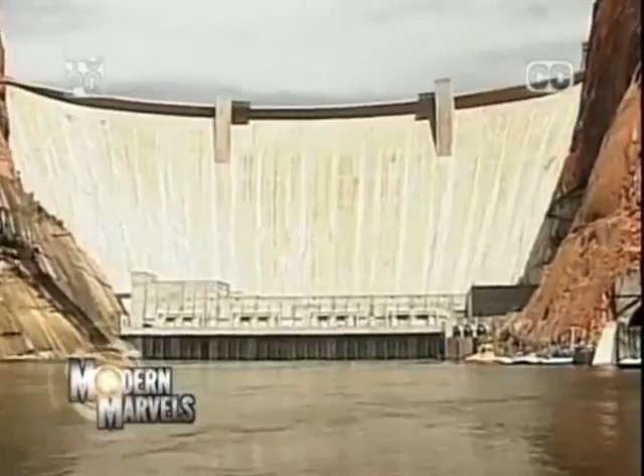A simple shape, a span across space and time, and the single most influential form in Western civilization, perfected by the ancient Romans. It spans great rivers, takes us deep into the sea, and will enable us to live on other worlds. It's the basic building block in human history, finding its way into millions of structures for millennia. Now, the Arch, on Modern Marvels.

The Arch. In its many forms, this uniquely adaptable and robust shape has dominated the Western world since its invention over 2,000 years ago. Its characteristics: able to span long stretches, carry incredible loads, and withstand the ravages of time, all while being composed of the simplest materials, make it the most enduring building form known to man.

The idea behind an arch is that it channels the force that the structure needs to support in a way that is most efficient in terms of the way it uses the material. No other shape comes close to the arch and its relatives, the vault, cylinder, and dome, for efficiency. But there was a time when such structures were unknown.

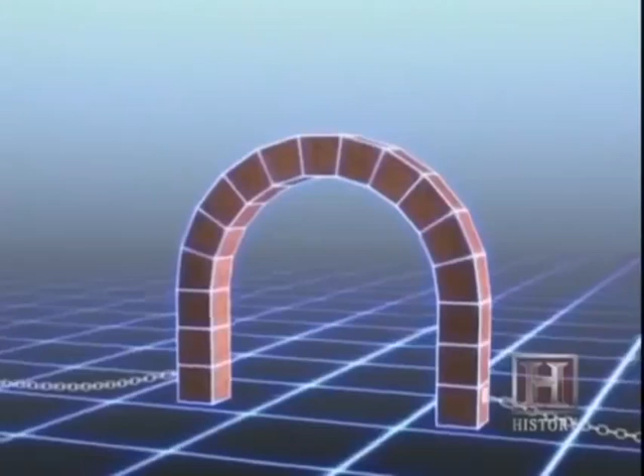The arch can carry enormous weight and is purely a compression structure. That is, it can withstand pressure. The more force that's applied, the more compressed the arch becomes. On the other hand, if you apply tension to it, it loses its strength rapidly as the legs of the arch begin to spread. The arch can collapse. The secret of stability in arch design is to contain the forces, or the line of thrust as it's called, within the arch.

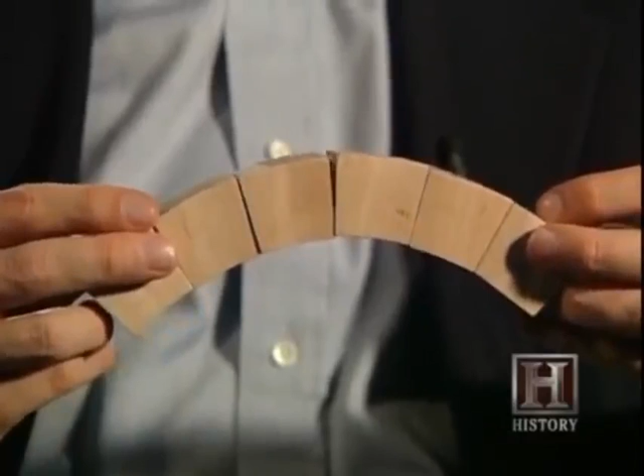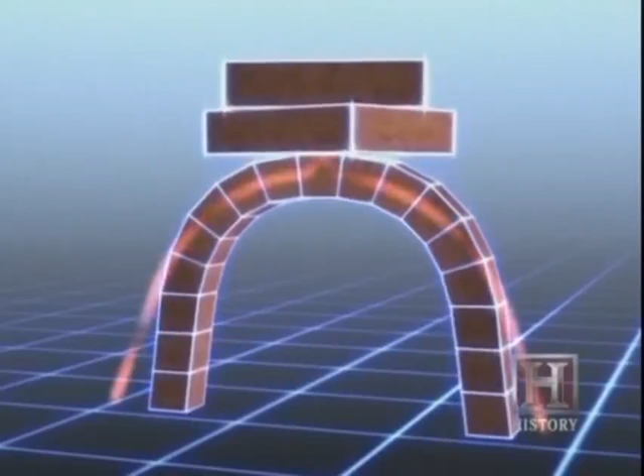As we move supports around, the arch can adjust to these different movements and can adapt with new internal forces. And the key really, or the magic, is that they can carry so many different possible loadings. And as the ground moves, the arch quite happily adjusts to it. It's in equilibrium, it stands. We can find a line of forces through one. As long as the line of force is contained inside the structure of the arch, or terminates at the arch supports, it can stand practically forever. But if the line of force moves outside the arch because of increased loads or changes in shape, it will fail.

The Romans understood this. It's a tribute to the fact that the Roman engineers knew about how their structures could redistribute forces even after they become damaged. Arches come in all sizes, shapes, and styles. The classic Romanesque arch is a semicircle, built of stone or concrete.

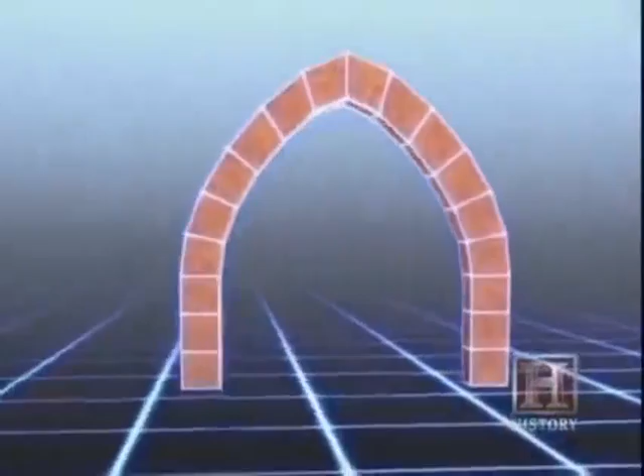The Gothic arch from the 12th to 15th centuries has a pointed crown, allowing for more open spaces. Other arches include the basket handle arch, popular in Britain, which allowed a very broad opening. And in the East, horseshoe or Moorish arches appeared, with less structurally sound but unique-looking forms.

Although an arch's primary purpose is to support a load, its shape invited artistic innovations. As arch design progressed, the use of stone became a highly refined craft. The placement of stones, and especially the keystone, became a personal statement of the designer. A keystone is the last stone placed in a traditional arch. It's the stone that locks the arch into place.

Keystones were traditionally made larger and more important looking than the other voussoirs or arch stones. But surprisingly, this was largely a cosmetic choice. You hear a lot of talk about the keystone in an arch being this most critical piece, this most special piece. The keystone has the smallest amount of force, yet it gets all of this attention. It's kind of a paradox.

You'd expect to have more force at the middle, but the smallest force is at the middle. And therefore, a keystone does not actually carry very much force. If you have an odd number of voussoirs, they're called the pieces of an arch, then there is an odd one in the middle, which is the keystone. If, however, you make the arch out of an even number, then there is no keystone. But being the last stone in the arch, the keystone does have one very special purpose. Without it, the arch will fall down.

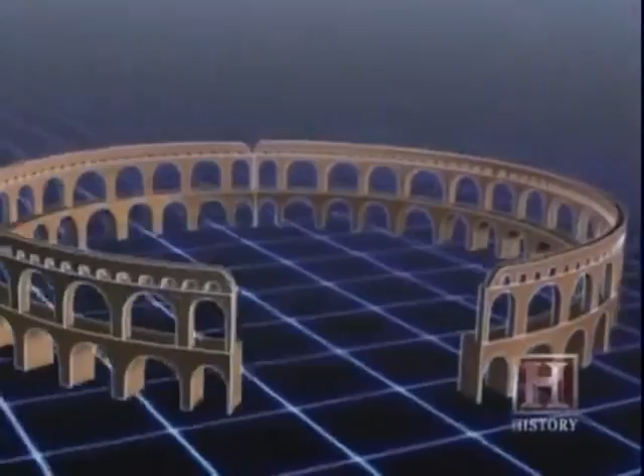These astounding structures were a stunning testament to the ingenuity of their designers. But there was much more to come from the basic design of the aqueduct. I think of the Colosseum kind of as a Roman aqueduct that's folded onto itself to enclose space. It was the arena of the emperor and the citizens of Rome. Over 600 feet across at its widest point and 160 feet high, the Colosseum was home to myriad events. It allowed up to 75,000 spectators to watch great gladiatorial battles in architectural splendor.

The use of concrete is perhaps the most exciting aspect of Roman building technology. The arch is a structural form. It would work with concrete or it would work with rock or masonry, but the Romans took the arch to another level. The Roman invention and use of concrete for construction led to the development of another use of the arch, the barrel vault. So instead of a single arch now, you have a room with a series of arches, and so that's three-dimensional, it's a vault.

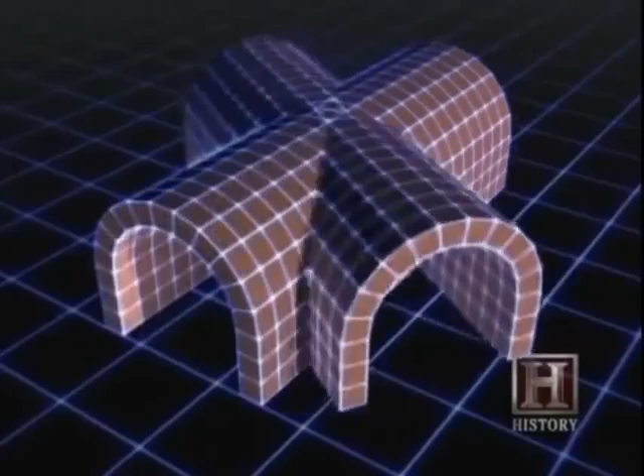But the Romans went way beyond that. They also took arches and they turned some arches 90 degrees to the first and made intersecting arches. So it's as if you took two barrel vaults and intersected them, and in the middle you have a big open area that's a groin vault. That's a clear Roman innovation.

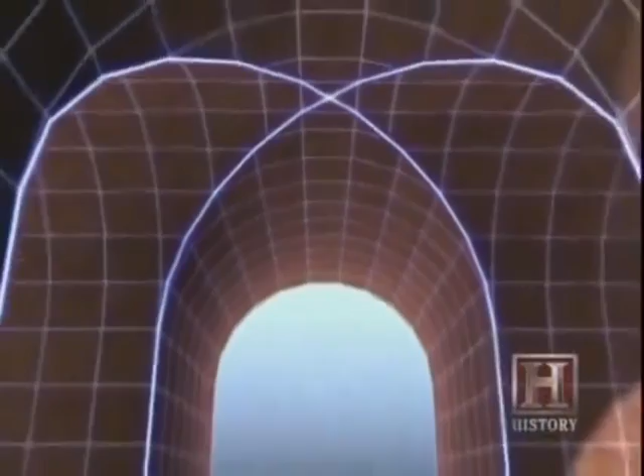Impressive though it is, the Colosseum was just a precursor for more remarkable structures to come. Just across Rome, the Pantheon was built in 125 AD. This innovative building would set the standard for centuries to come.

One sees structures like the Pantheon, and the most shocking, breathtaking aspect of walking into a structure like that is open space. What domes afford is interior space unencumbered by column support. The columns, of course, or the walls are on the periphery of the dome, and they're transmitting all the compression force from the dome down through the walls into the foundation.

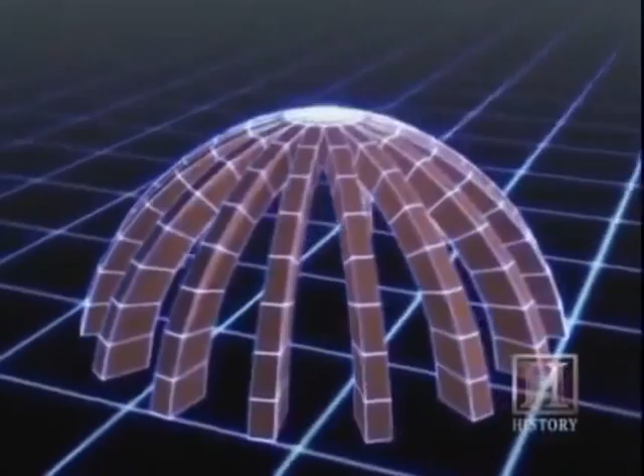The roof of the Pantheon was the world's first large dome. It was an unprecedented accomplishment. You could think of a dome as a series of arches that are all leaning on each other in the middle. But in addition to that, a dome acts as a series of hoops that surround the dome. So what prevents the dome from falling inward, there are arches in plan that are really circles that also can carry load in each ring of the dome as you build up.

The Pantheon has a traditional temple entrance, which opens to the great dome-covered interior. But there's a surprise once inside. In the exact center of the dome, there's a hole that brings in light. So you have all of these arches that are leaning together to form the dome. And exactly at the center, where they all want to lean together, Roman engineers take away the material and build a hole in the middle of the dome.

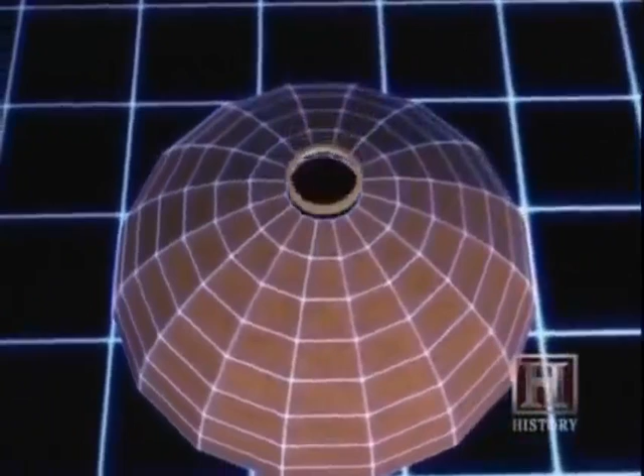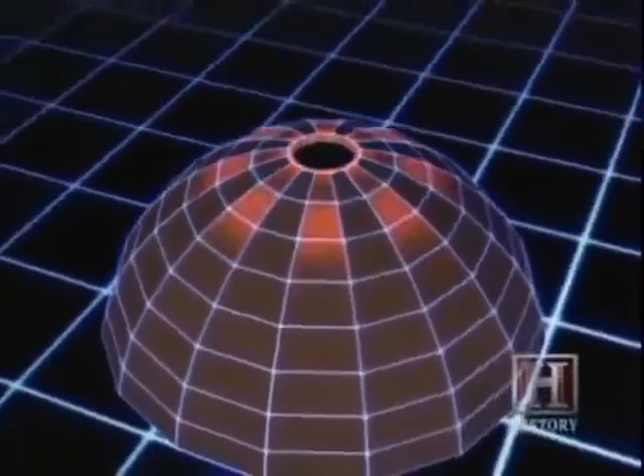The 30-foot wide hole in the dome center, called an oculus, is a huge compression ring made of stone, which in effect is a series of arches forming a circle. The horizontal forces of the dome, which keep the structure stable, converge at the top. It was a daring move by the Roman engineers. The Pantheon was an amazing achievement. But after the fall of Rome, builders would find other spectacular uses for the arch.

The Colosseum originally had 80 arches in each exterior level, totaling 240 arches above ground alone.

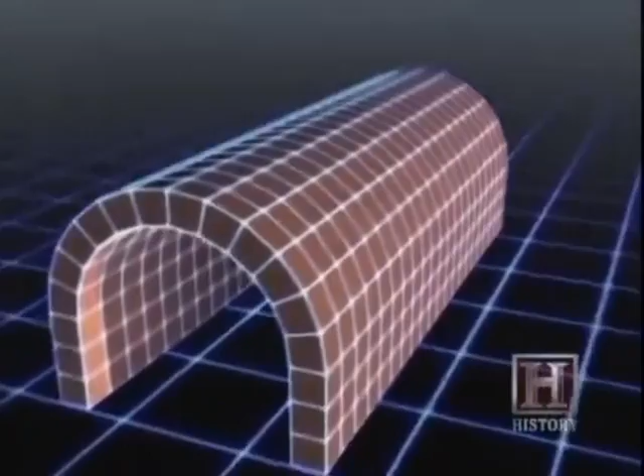The biggest advancement during the Gothic era was getting away from the barrel-type vault and using more of an elliptical arch or a pointed arch. So from a visual perspective, it allowed the arch to be much taller. And the goal of the master builders during the Gothic era was to try to bring in as much light to the interior of the cathedrals as they could. So the taller they could make the arches relative to the width, they were able to introduce far more area of window.

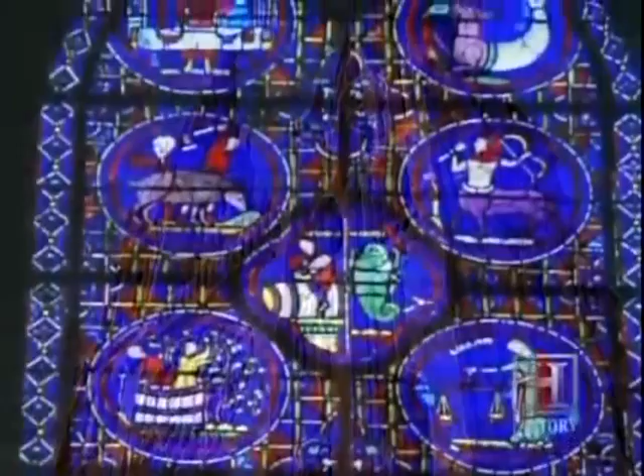The era of the Gothic cathedral also saw the use of less massive design elements. Continuing to strive for higher and grander, church builders developed new techniques to maximize their uses of the arch. Gothic cathedrals such as Notre Dame in Paris are lasting examples of the incredibly complex workmanship of the master builders of the time. Cathedral ceilings reached heights of up to 150 feet. As these arches soared ever higher, materials were used more sparingly to allow for this vertical growth, resulting in thinner walls, pillars, and vaults.

But with this increase in height, intense forces were exerted by the soaring stone arches and had to go somewhere. The Gothic designers came up with an ingenious solution. You still have to get the thrust of the arch down to the ground. So how do you do that? That's the real challenge in Gothic construction. And this is where the really ingenious breakthrough comes of building flying buttresses, which are exterior, elevated half arches, really, that carry the flow of forces from the main vault down to the ground.

So as the arched ceilings grew wider and taller, the sides of the building wanted to spread. The use of flying buttresses provided a rock-solid method of reinforcement for the thin cathedral walls. You can think of it as half of a Gothic arch. So a Gothic arch with a point at the middle. If you take those two sides and separate them, they each want to lean inward. And so they can help to resist the thrust from the central nave that acts between those two flying arches.

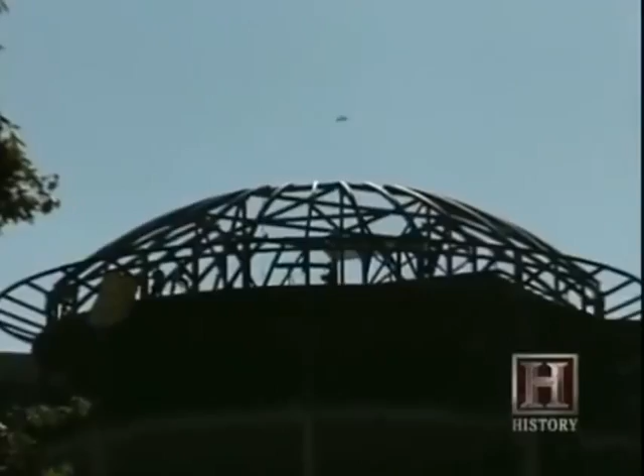Domes continue to be used in modern construction to great effect, but the arch has found its way into other, sometimes surprising modern structures. And some arches literally do their jobs lying down.

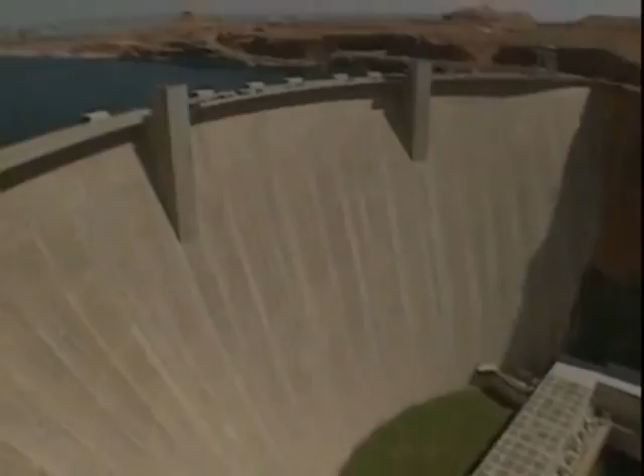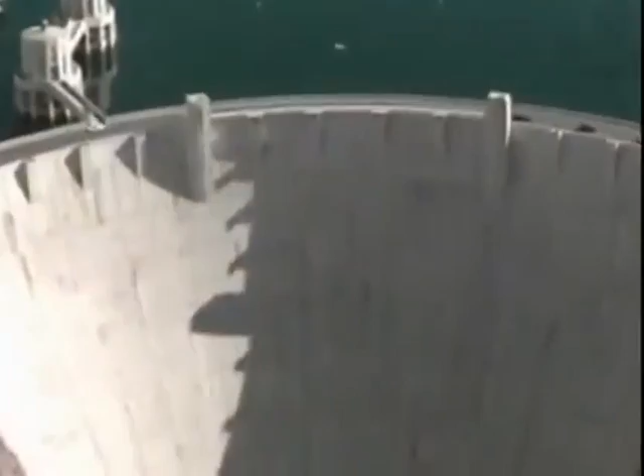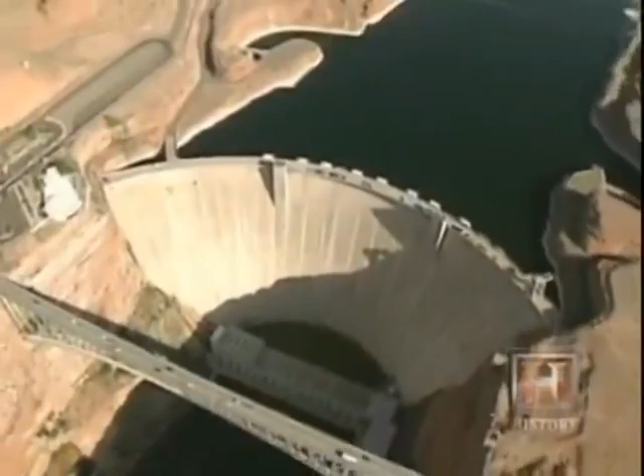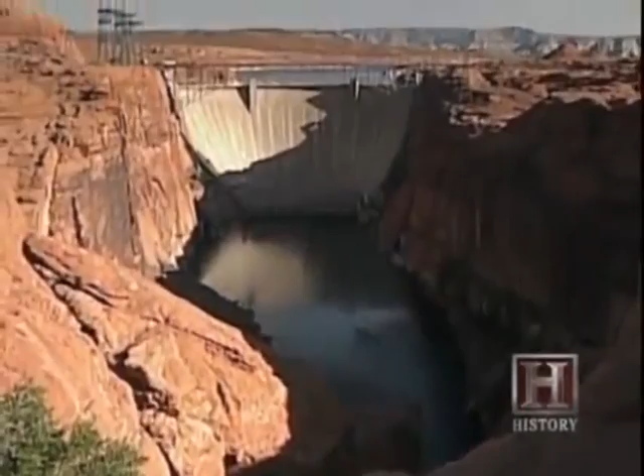The mighty Colorado River is harnessed in the American Southwest by 9 main dams. 2 of these enormous concrete structures are examples of the arch turned to a new and critical task. An arch becomes a dam when the arch is turned on its side and has the pressure of the water acting against it. In fact, many of these structures are just that, a simple arch.

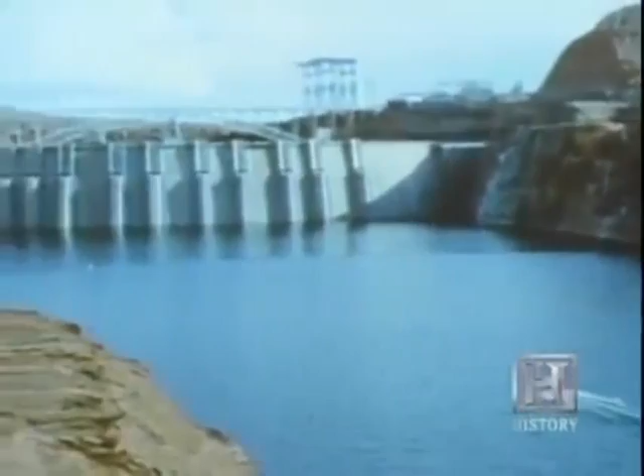Arch dams are different than other dams because of the nature by which they resist the water forces. Most dams do so by the sheer weight or gravity, and arch dams do some of that because they have mass, but they're an arch tipped on its side, and it has arch action that thrusts the loads into the abutments, which are at the end of the arch.

And those loads are resisted by the rock of the canyon, and they pretty much put the rock of the canyon into compression, which makes arch dams ideal for steep canyons, V-shaped, U-shaped canyons with good strong rock on either side, which is where you'll find most arch dams.

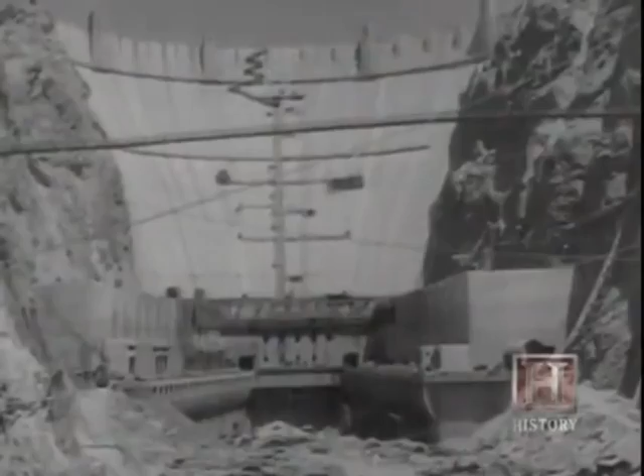726 feet tall and up to 660 feet thick at its base, Hoover Dam was the largest concrete structure of its time. It required over 4.5 million cubic yards of concrete to build the massive arch. And it withstands the pressure of 9.2 trillion gallons of water in Lake Mead.

Because the water pressure comes from the depth. It's the hydrostatic pressure that comes from the depth of water that's supported. So, in fact, supporting a lake that's only 1 foot wide provides the exact same force as a lake that would be 100 miles wide.

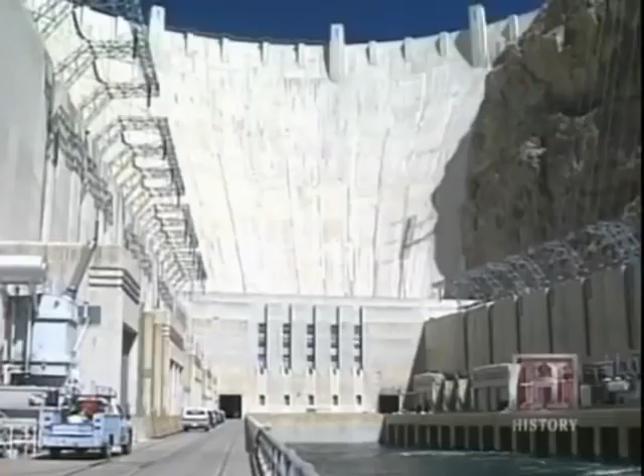As dam designs became increasingly daring, relying more upon the strength of arches, dams became thinner and more refined. One such structure resides not far from Hoover Dam. Glen Canyon is a beautiful arch. You can't deny that it's a very beautiful and magnificent engineering marvel. It's more of a thinner section. It's more of a true arch.

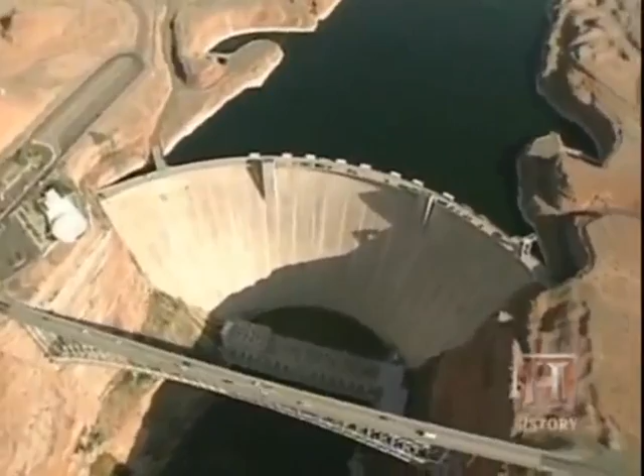With a thin concrete slab 710 feet high and 1,560 feet long at the top, the dam relies on the shape and characteristics of the arch to resist the force of the water behind it, while using a minimum of material to do so. It's 25 feet thick at the top and over 300 feet thick at its base, and is extremely strong for its relatively limited mass.

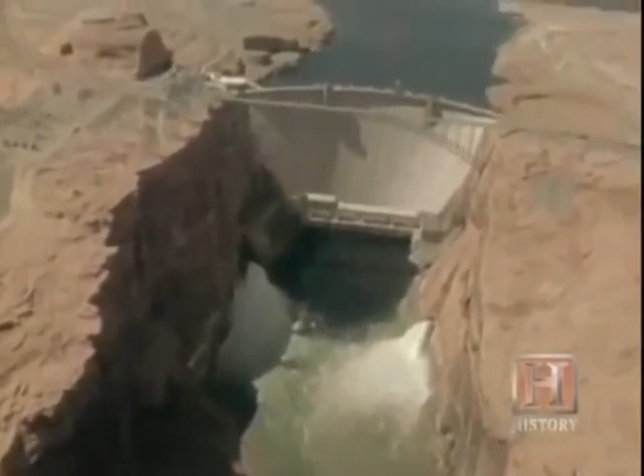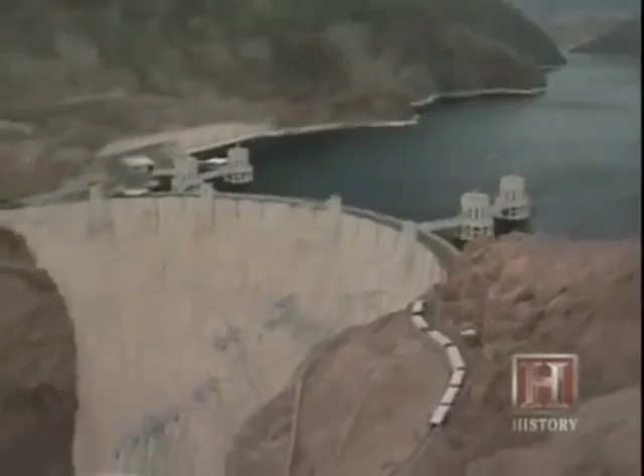The idea of the arch dam is to keep everything in compression and to minimize the bending that goes on in an arch. And if the dam can avoid tension, the enemy of any arch, and stay in compression, it can last for hundreds, perhaps thousands of years.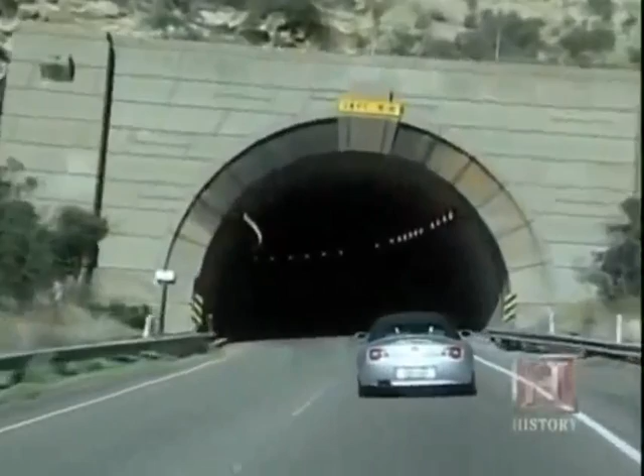Dams are clear examples of the strength of the arch. But less obvious, yet familiar to us all, are tunnels, which use the strength of the arch deep underground. Another example of arch action in which forces are redirected into compression is a tunnel. Many of us drive through tunnels on our daily commute.

You'd have to ask yourself, where does the weight of all of the soil and rock above the tunnel go? It has to get redirected. It has to go around the tunnel, and it goes around the tunnel because of arch action.

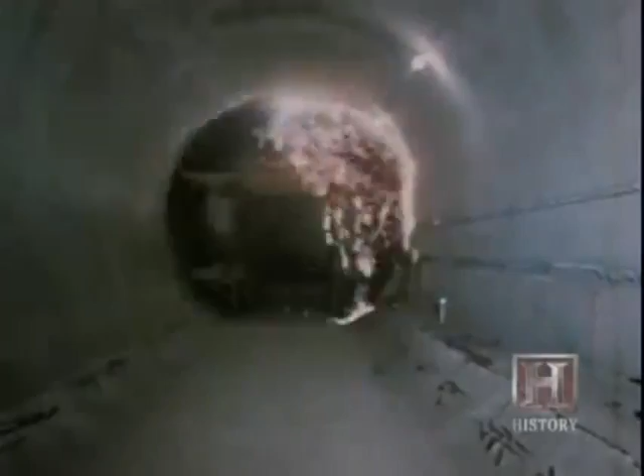While the Romans built small arch tunnels, the craft of modern tunneling really started in England in 1825, when Marc Brunel took on the great challenge of digging beneath the River Thames. In the case of Brunel's tunnel under the Thames, if he'd built just one large tunnel, one large opening, he was concerned about the loading coming from the sides failing the tunnel.

And so what he did was he introduced a central pier with two kind of arches that were bearing on that central column. He was concerned about the size of the forces, so he cut the span in half by adding a central wall. Brunel's innovative tunnel paved the way for something much bigger.

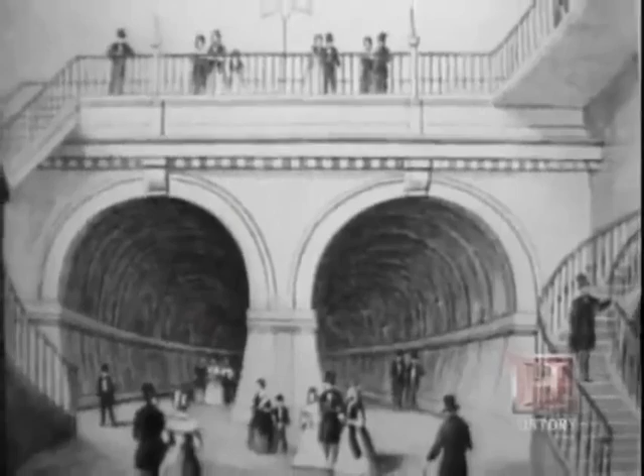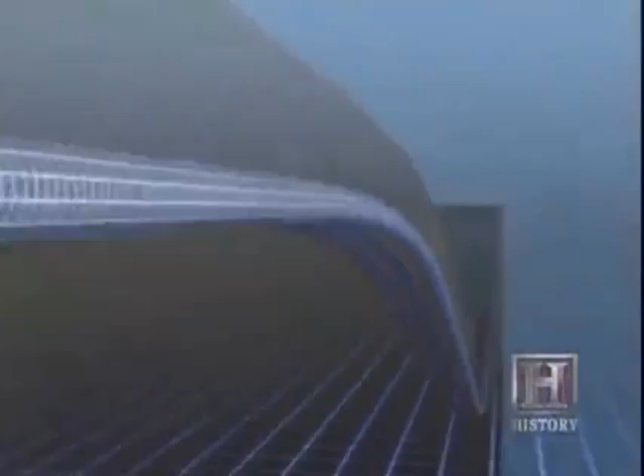Since before Brunel's time, engineers had dreamt of a tunnel under the English Channel, connecting Britain with France. This dream became reality in 1994. An arched cylinder was the perfect answer for the 31-mile run under the English Channel, up to 530 feet under the water's surface.

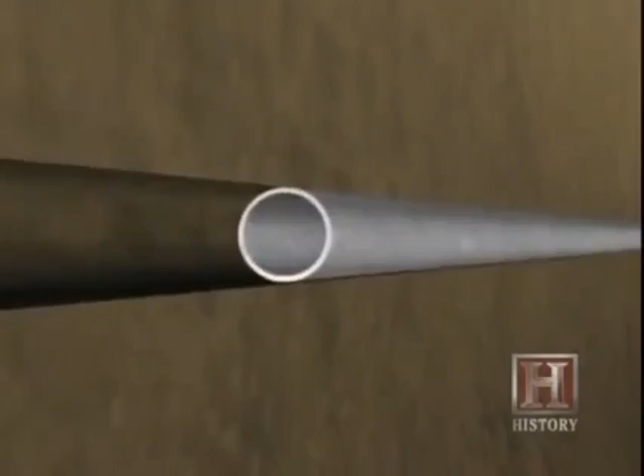These tunnels are 24 feet wide and are formed of a series of continuous arches, opposed to each other at an infinite number of points. In this application of the arch, the triple tubes are lined with a combination of concrete and iron compression rings, up to 23 inches thick. A cylindrical tunnel is an example of almost perfect compression, the best environment for an arched form.

Just as the arch provides us access under the sea, so it provides passage over the sea. Without the arch, bridge building as we know it would be impossible. When built, the Channel Tunnel was the most expensive construction project ever conceived, with a price tag of $21 billion.

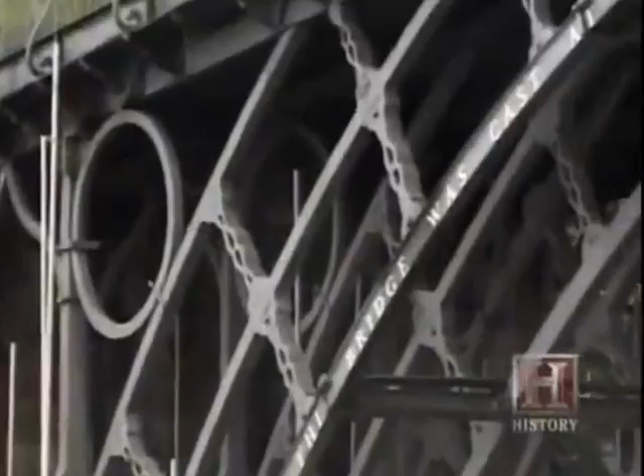In the 18th century, materials such as iron became viable for bridge construction. The Coalbrookdale Bridge in England is an example of an early cast iron structure. Completed in 1779 after only 3 months of assembly, it spanned 100 feet and was the first all-iron arched bridge. This beautiful structure was born of the Industrial Revolution and allowed for a light, airy appearance that greatly excited bridge designers worldwide.

In 1880, Gustave Eiffel, later of tower fame, began construction on one of the first metal arch bridges in France. Gustave Eiffel was a bridge engineer, and he built probably the most elegant iron arch bridge ever built, which is the Garabit Viaduct in central France. You had to have a long span, and you had to have it be stable side to side.

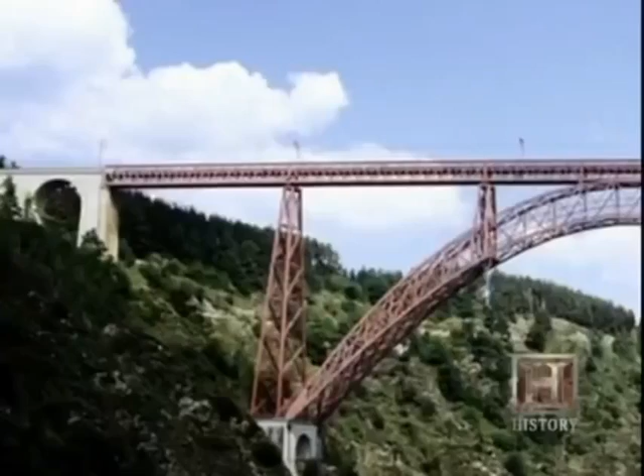So the Garabit Viaduct solved this by having a beautiful crescent-shaped arch, but then Eiffel flared out the base of the arch in the same way that he flared the legs of his tower five years later in order to reduce the loading and make it more stable under the lateral wind load. Completed in 1884, the viaduct spans over 1,850 feet and stands 400 feet above the river. It would inspire many bridge builders to lend an artistic flair to their work.

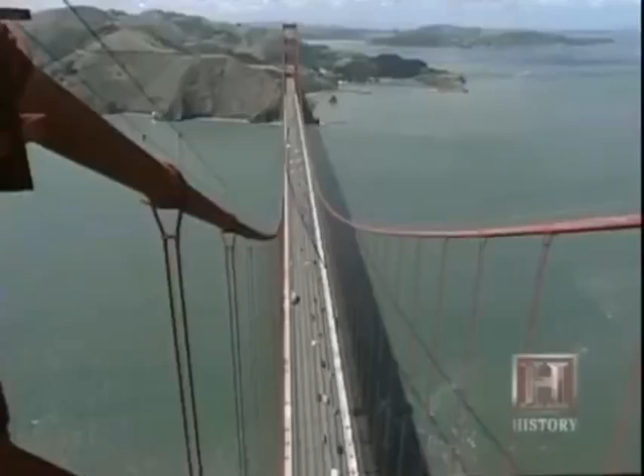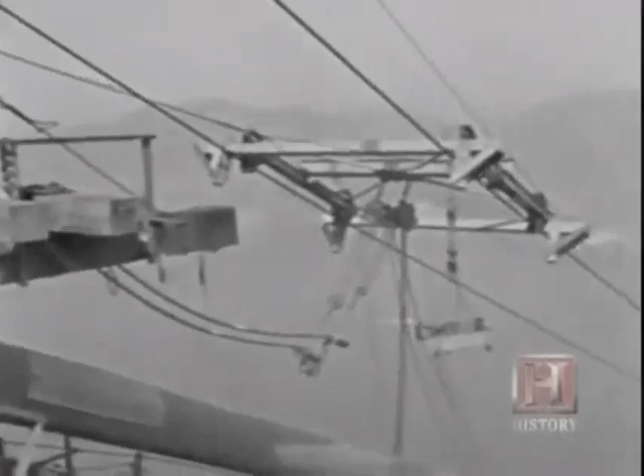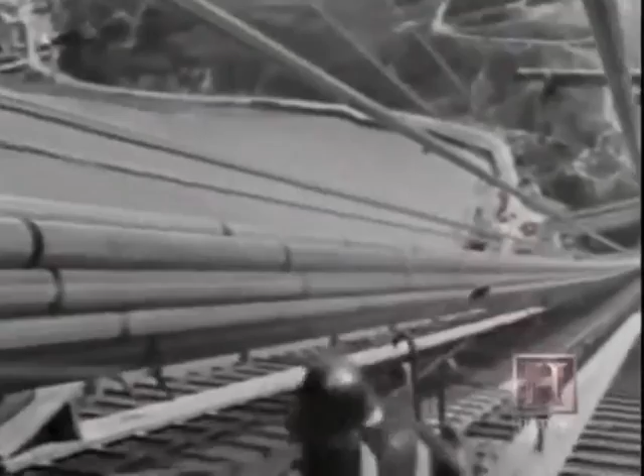The arch even finds its way into the longest bridges in the world, suspension bridges. San Francisco's Golden Gate is a classic example. The building of the Golden Gate was a landmark in civil engineering. It was completed with fewer injuries than any previous bridge construction and would span one of the most treacherous waterways in the world. By the time it was completed, the use of an inverse arch as a suspension element was well established.

A suspension bridge is exactly the opposite of an arch bridge. If we think back to the hanging chain, the loads on a suspension bridge are hanging down, suspending the roadway from a single cable or sometimes a few cables that are parabolic in shape, and they're pure tension. So if you wanted to turn a suspension bridge into an arch bridge, you would have to freeze those cables, turn them upside down, and put them under the roadway.

The roadway of a suspension bridge often has an upward camber in the middle, a slight arching effect. And that's largely aesthetic, that it somehow is more comforting to the eye to see a slight rise in the roadway. In addition to the huge cables that hold the bridge up, acting in tension, many suspension bridges are still supported in part by the traditional compression arch. On the Golden Gate's south end, a large metal arch supports the roadbed as it clears historic Fort Point.

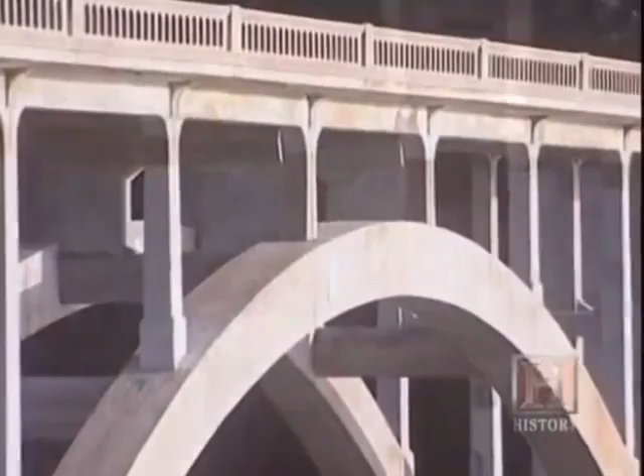Arch-supported bridges come in many forms and varieties. Some, such as the Bixby Bridge on California's Pacific Coast Highway, use just one long, shallow arch. This stunning span, completed in 1932, is 714 feet long and stands over 240 feet above the crashing waves near Big Sur. The roadbed is connected to the arch with numerous spandrel columns, or vertical braces.

Bixby Creek Bridge was built in the 1930s, and initially when the bridge was put out to bid, the contractor had the option of constructing a steel arch as opposed to concrete arches. The thought being that the steel arches would be much easier to construct because they could be constructed from the roadway. They wouldn't be impacted by the waves or the creek down below. However, the contractor decided that it would be less expensive to construct the bridge using the concrete arch structure.

One advantage of concrete in such a bridge is its incredible strength. An arch structure is primarily a compression element. The vertical load path of the bridge will go from the T-beam deck into each of the columns, and then from the columns into the arch. The arch will then take that load and distribute it to the two towers on either side of the bridge. That's the beauty of an arch.

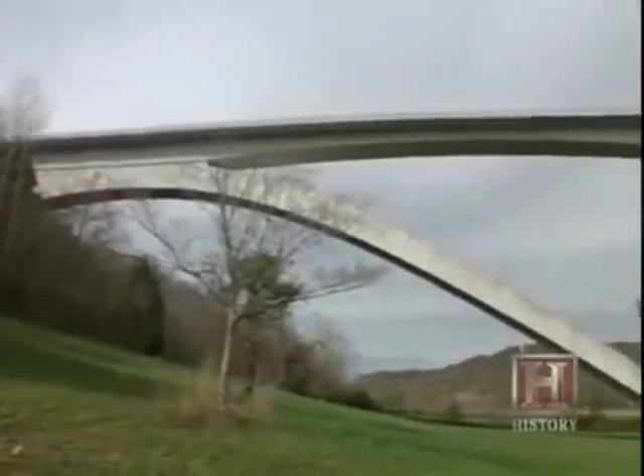Other spans have arches above the roadway, such as the Desmond Bridge in Long Beach, California. But this bridge is rapidly deteriorating and will soon be replaced with a design pioneered by the Natchez Trace Bridge in Tennessee. This bridge is the first precast concrete segmental arch bridge in the United States with 582-foot span.

The bridge is unique because traditional arch structures carry the load of the deck through a series of vertical members, which are called spandrels, that are then connected to the arch. In this case, the vision was to open up the arch and eliminate the spandrels. That way, the load of the deck is all carried at the crown of the arch.

The arch is in fact independent from the superstructure. The superstructure sits on bearings on top of the arch, and it's the load that is transmitted from the superstructure, the top deck, into the crown of the arch, which transmits that load. The Natchez Trace Bridge represents the state-of-the-art in arched bridge construction. And since its completion in 1994, it has become an emblem of modern bridge design.

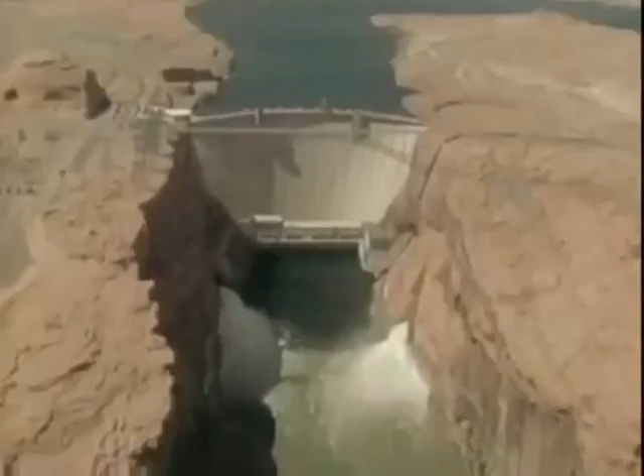In the past, arches have served us in buildings, dams, tunnels, and bridges. And they will continue to serve us in our ever-expanding future. The longest concrete and masonry arch-supported bridge in the world is the Rockville Bridge in Pennsylvania, completed in 1902. It has 48 arches in its 3,800-foot span and was built primarily by immigrant Italian stonemasons and Irish laborers.

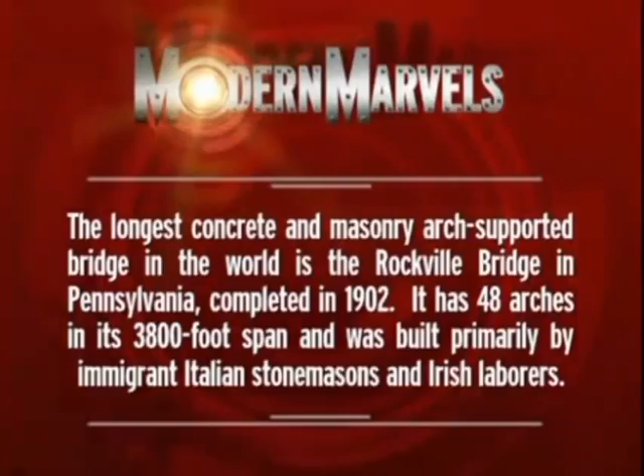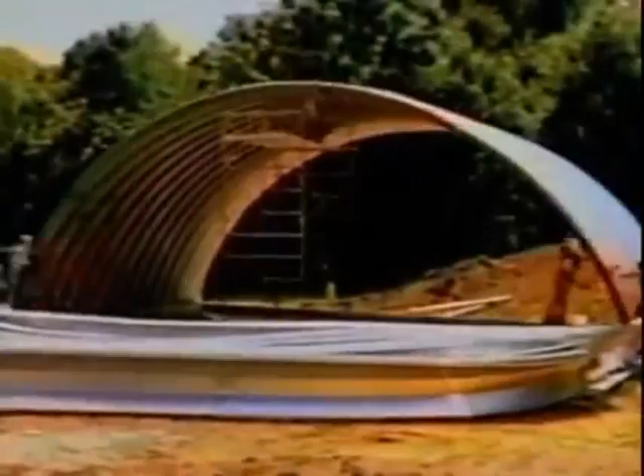Not all arches are structural. The graceful form of the arch and the dome has captivated onlookers and users for thousands of years. I think the arch is a consistent form that always recurs, regardless of material and culture. You can see it in almost every architecture in some form or another. It's very interesting to see its transformation in contemporary times into new materials and forms.

We're surrounded by arches that are primarily ornamental in function. Some are mere add-ons to contemporary architecture, while others are integral parts of an overall design. But perhaps no single contemporary structure makes a stronger statement than the Gateway Arch in St. Louis, Missouri.

Yeah, the St. Louis Arch is sort of typical in that from there you could see the way the shape of the arch is, where the loads are concentrated. If you look at it, you'll see at the very top, the apex of it is sort of a thin section because there's not too much load being accumulated there other than just the weight of that particular section.

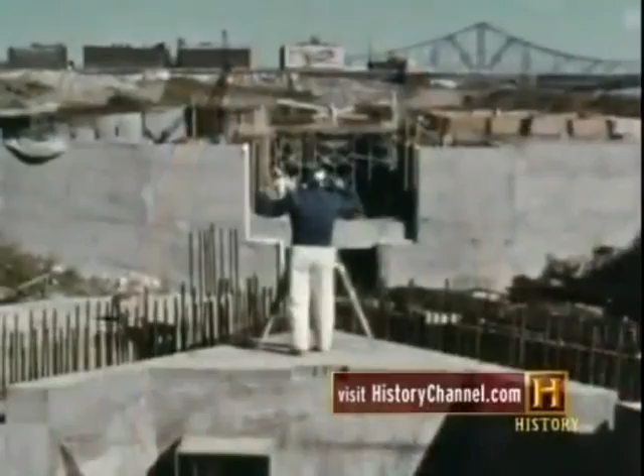Built between 1963 and 1965, the 630-foot high arch is a masterpiece of design. The legs of the arch are 54 feet wide on each axis at ground level and taper to only 17 feet at the top. The massive foundations that support it were dug 60 feet deep, 30 feet of which extend into bedrock.

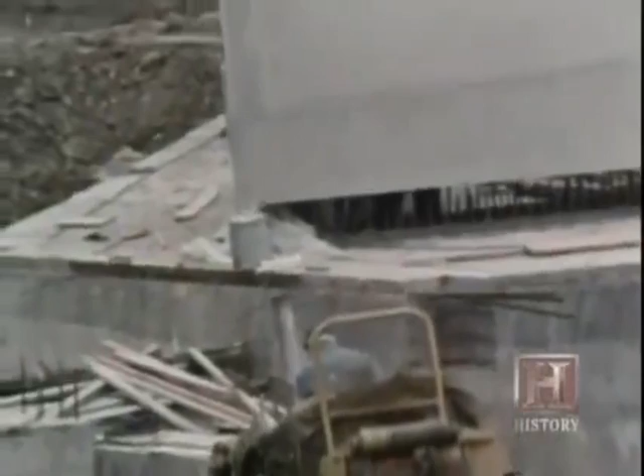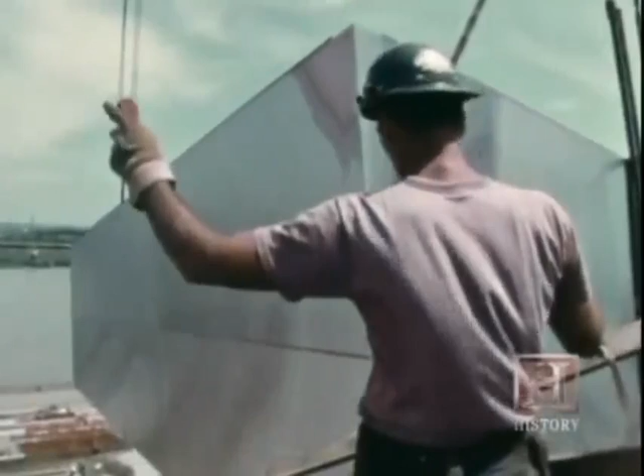The giant arch is supported largely by the outer skin, which is composed of stainless steel weighing over 900 tons. The arch was stacked out of individual metal sections. Cranes lifted each new segment toward the top until the last keystone section was placed. While the Gateway Arch must support itself vertically, it must also be able to sustain high lateral forces, such as winds. So we have to make sure we have a thick anchor where the arches end.

This giant arched form was as much an artistic statement as an engineering landmark that drew on a classical shape. I think people are drawn to arches really just because it's a familiar form, mostly. It's something that you've seen throughout history. Almost every period has an arch appearing, and it's so familiar to people, that's what makes it appealing. The St. Louis Arch is perhaps the ultimate expression of the arch as art. But the basic shapes of arches, domes, and tubes continue to serve us in a stunning diversity of ways.

Even submarines use the power of the arch to do their stealthy work. Submarines are pressure vessels that have to resist the great force of the water, particularly when you go deep underwater. The external pressure just wants to crush a submarine. And so the section of the hull, the shape of it, is a circular shape that resists this pressure in compression. So you can think of a submarine as a circular arch.

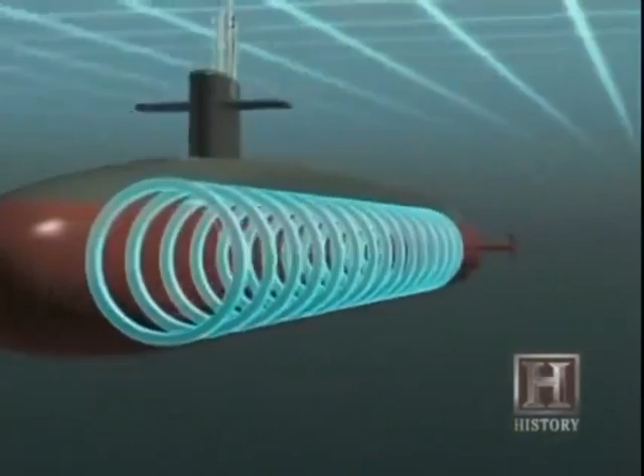The U.S. Navy's newest submarines use this tried and true design to dive deeper and prowl farther than ever before. Modern submarines are completely cylindrical, which enables the entire structure to become an arch in compression. And they use more arches inside, in the form of braces, to withstand pressures of over 400 pounds per square inch as they dive to record depths.

In addition to the cylindrical shape of the hull, each end is capped with a dome, further strengthening the vessel. Modern submarine hulls can be up to 3 inches thick, and many are able to dive below 2,000 feet. This is accomplished by augmenting the strength of the arch with exotic metal alloys.

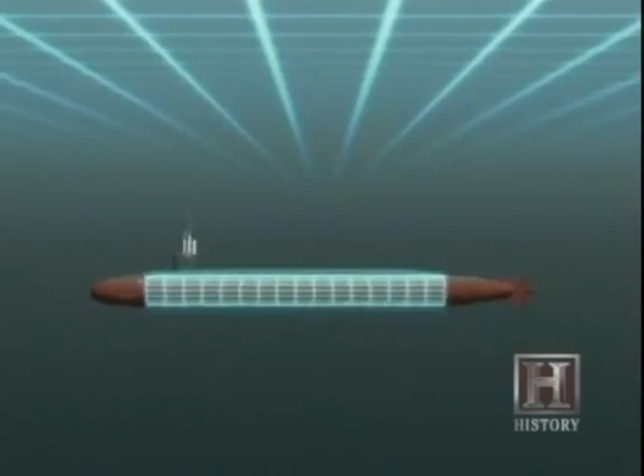These metals must combine the ability to become compressed with a tendency to be elastic, so that the cylinder doesn't fail under the crushing pressure. So in effect, the arches used in a submarine must survive both compression and tension at the same time. These advanced technologies may lead to the colonization of Earth's final frontier, the bottom of the sea.

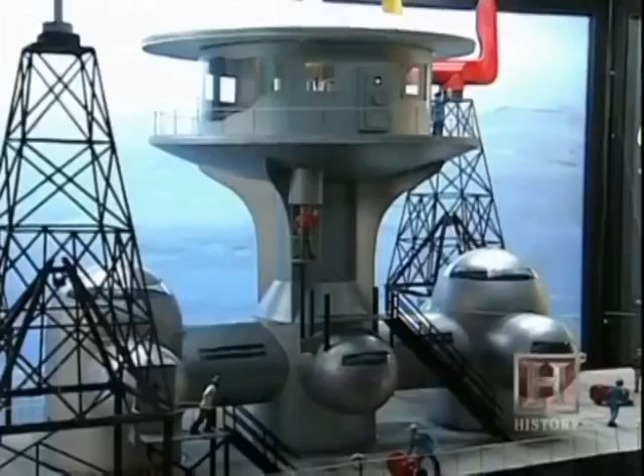When we talk about extreme environments, one example would be under the water, where you have the structure acting as something that resists compression, because the water is very heavy and it creates enormous forces upon the habitat where people live. So in that case, they're acting as compressive structures, and they tend to be rather thick because they have to withstand the pressure. But with modern alloys and composites, people should be able to live undersea without fear for years, even decades at a time.

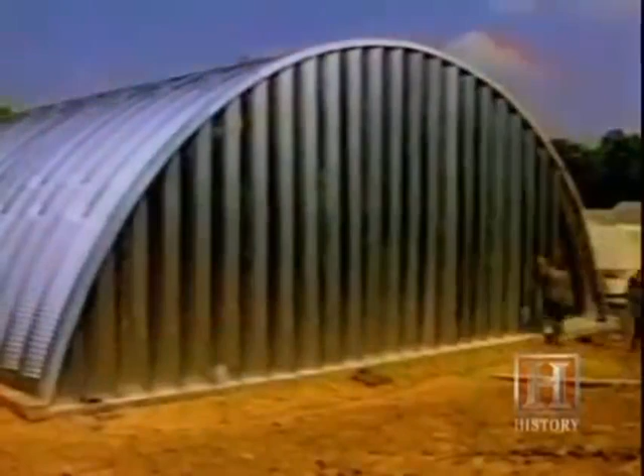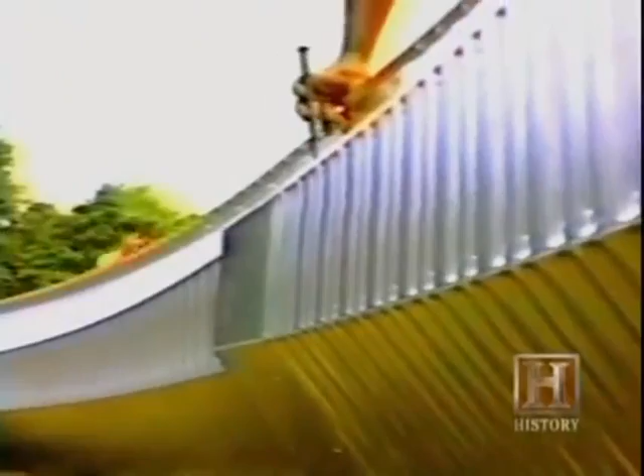On dry land, the arch has been used for years in the design of semi-permanent battlefield structures, now used in civilian life, such as Quonset huts. And all that was a big arch, elongated arch in one direction, and it was very efficient to put together very fast, and of course the military made great use of that. The Quonset hut's strength is derived not just from the arched frames, but also from the multi-arched corrugated materials used to cover them. New designs continue to evolve, using this same time-tested shape.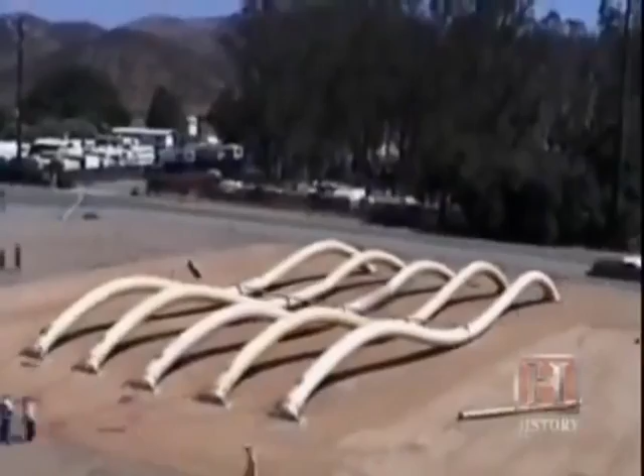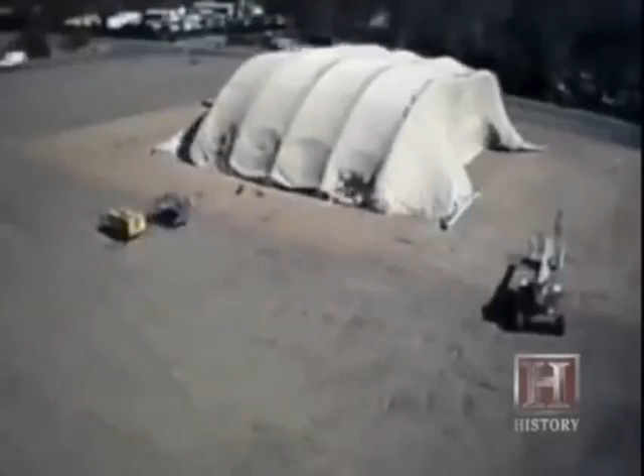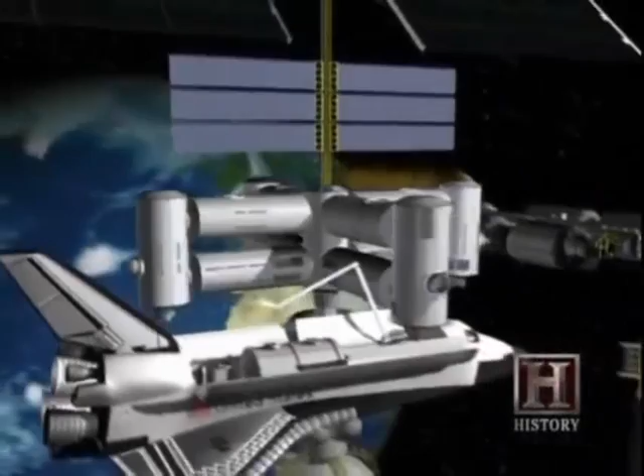In another exciting application, the U.S. Army is experimenting with a giant inflatable arch, able to lift huge loads. These arches are also used inside giant inflatable buildings and may one day replace structures such as the traditional Quonset hut because of their increased portability and ease of construction. But the strength of the arch goes beyond the confines of Earth. For anywhere gravity applies, the arch will serve as a basic element of construction.

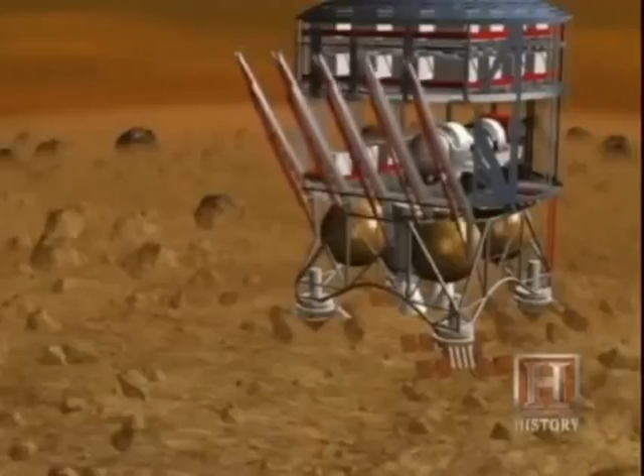On the cold, dry surface of Mars, arches, tubes, and domes may house the communities of the future. A habitat, pressurized space, have the same laws of physics governing their design. And if we look at, for example, historic arches, they assume a certain shape because of laws of physics. The same thing happens in space. They're the same laws of physics that govern operations in space, but the conditions are often different.

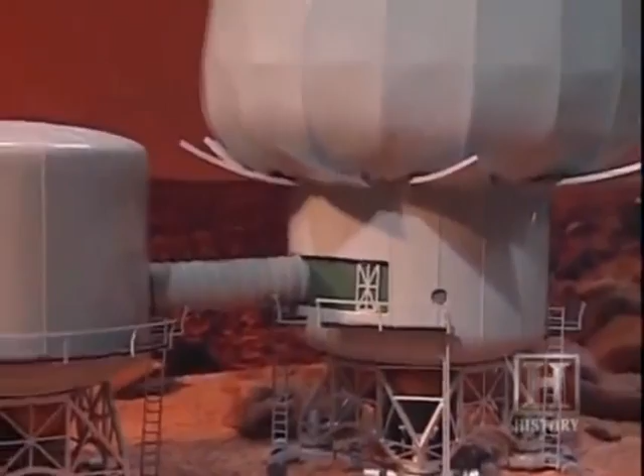And over my shoulder, we have a model of one of the Mars-based scenarios that we've established that has a variety of different kinds of elements. Most planned lunar and Martian colonies utilize tubes and domes in their construction. Some are inflatable, while others are made of hard plastics, composites, and metal alloys. We work with geometries. Our curved shapes are usually pressure vessels. So they tend to look like cylinders, thermos bottles, those kinds of things, but they typically are all circular in section.

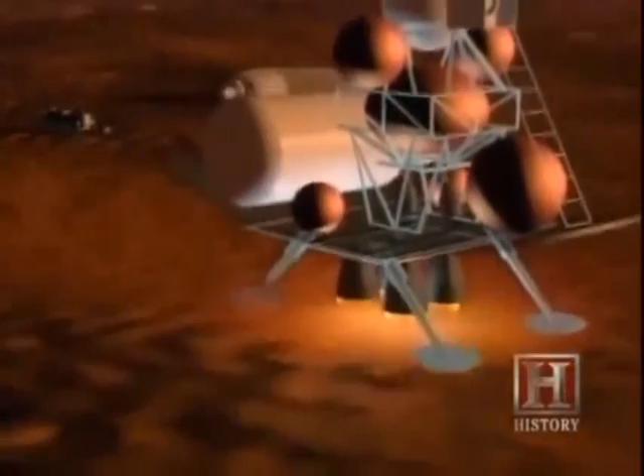But some of the most recent and daring plans for colonizing Mars harken back to the Roman era, using local materials for arch construction. Because it takes 6 to 9 months to get there, you want to use local materials on Mars in order to build. Well, what materials are available on Mars? There's essentially rock and dirt.

This project developed an entire settlement on Mars, essentially a small city, made only out of arches and domes. It almost looked like an Islamic city from the Middle Ages. But it's what we consider to be the most high-tech solution to the problem of building on Mars. These structures would become, in effect, tunnels, and house these interplanetary explorers under the Martian surface.

Similar structures already house astronauts in Earth orbit, and via deep space voyages, will someday reach even further into the solar system. Our building blocks in space, just as those that have served us on Earth for thousands of years, will utilize the properties of that most basic of shapes, the arch.